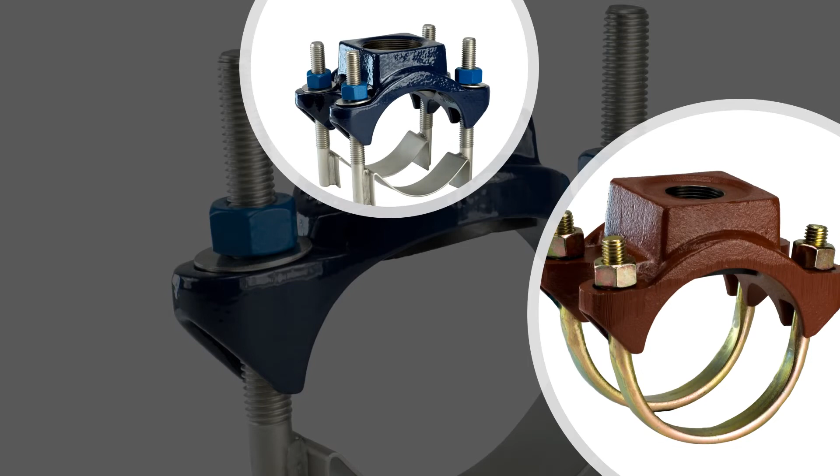Welcome to JCM Industries presentation, Installation of 400 Series Service Saddles. JCM offers a wide variety of service saddles for all types of pipe for selection by the engineer, pipeline owner, and contractor. Selecting the style and design of service saddle is determined by the type of pipe, line content, and environmental concerns. JCM service saddles offer a common assortment of coatings, strap material, and gasket compounds.

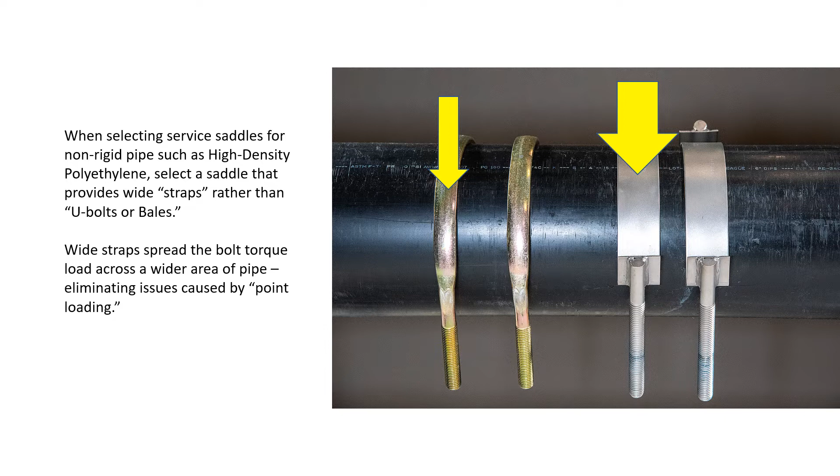JCM service saddle models offer two types of straps. For rigid pipes such as ductile iron, cast iron, and steel, the U-bolt bale style is suitable. For service saddles on flexible piping, including PVC and HDPE, and pipes subject to breakage such as asbestos cement, JCM recommends wide strap saddles. The wide straps spread the bolt torque load across a larger area of pipe, eliminating issues caused by point loading of the narrow U-bolt, and support the pipe wall on the circumference.

JCM service saddles are furnished with a broad gasket that provides a large footprint on the pipe and compensates for rough and pitted pipe surfaces. It is set in a retaining cavity that traps the gasket both internally and externally to prevent gasket displacement. Setting the gasket into the cavity also lowers the saddle body profile on the pipe, placing the solid casting closer to the pipe and limiting exposure of the gasket between the pipe wall and the saddle.

Saddle gaskets feature a hydromechanical lip that provides a positive initial seal on the pipe. Saddle gaskets are fully activated by water pressure applied to the top of the hydromechanical lip, and sealing pressure increases as the line pressure increases. The JCM gasket has a durometer that stores energy and will expand and contract with a pipe outside diameter that fluctuates, such as a high-density polyethylene pipe, maintaining a positive gasket seal on the pipe wall.

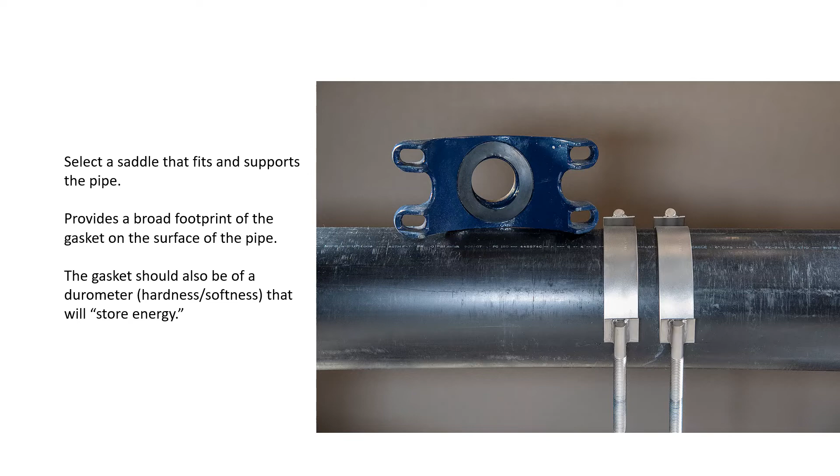For the best application, the specifier will want to select a saddle that fits and supports the pipe wall, that provides a broad footprint gasket on the pipe to provide maximum pipe-to-gasket sealing area, and has a gasket that stores energy. When planning the installation, a full review of the printed installation instructions is recommended, so any details can be addressed prior to arriving at the job site.

Some helpful tools to have on hand at the site include a pipe OD tape, inspection mirror, spray bottle of soapy water, liquid dish soap, and a field-grade torque wrench. Upon opening the box, check that all the parts are present, that the fitting is free of shipping damage and is the correct size for the pipe. For flexible pipe and fixed OD pipe, JCM offers saddle ranges that are pre-formed to that pipe OD that help prevent the installer from over-tightening the saddle on the pipe.

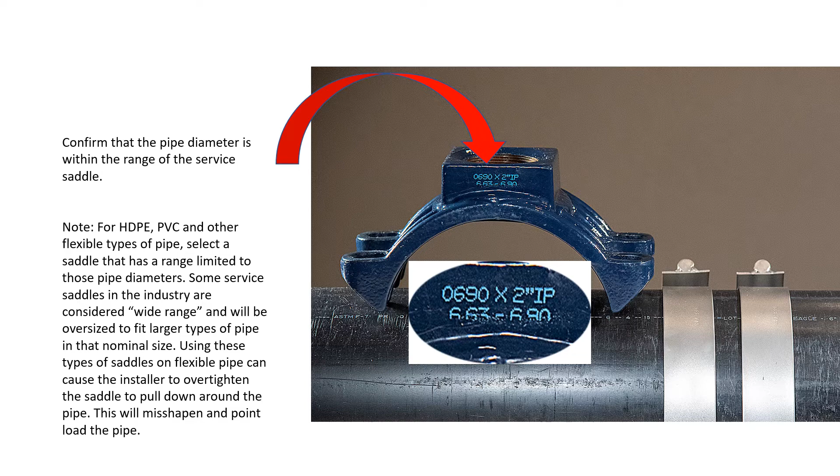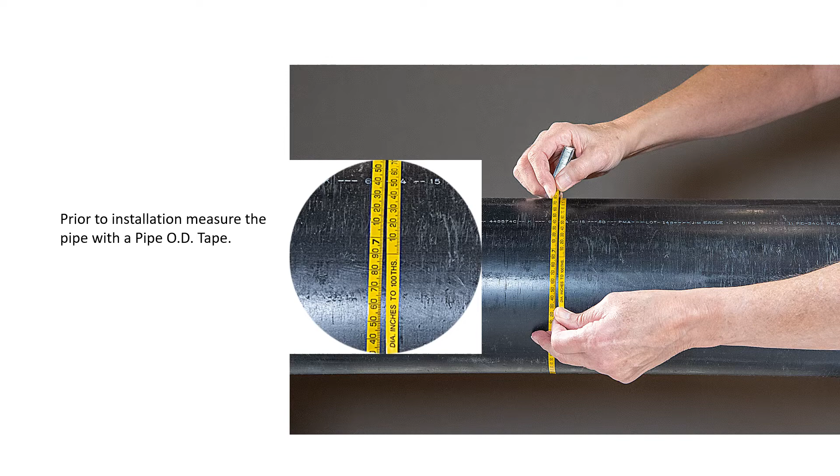Begin the installation by scraping and cleaning the pipe surface, especially where the gaskets make contact with the pipe. Remove any scale, pipe wrap, debris, or dirt that may interfere with the sealing of the gasket. This is a good point to inspect the pipe at the tap location for integrity, size, outside diameter, and any surface irregularities, including any damage that may have occurred due to excavation. Measure the pipe with a pipe outside diameter tape to confirm that the saddle is the proper size. A caliper can be used to determine if any pipe eccentricity exists.

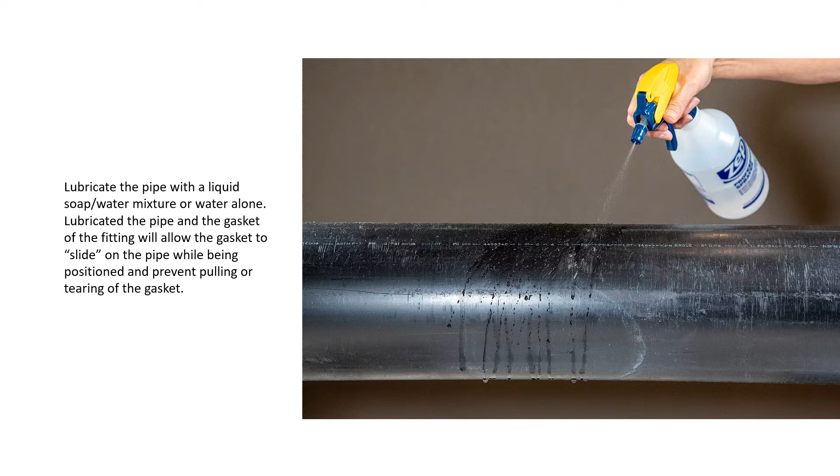Lubricate the pipe and the gaskets with liquid dish soap mixed with water. Soapy water is safe and dissipates in water. If soap is not available, use plain water. Lubricating the pipe and the gasket of the fitting will allow the gasket to slide on the pipe while being positioned and prevent pulling or tearing of the gasket. Do not use an oil-based pipe lubricant. It can leave a film on the pipe gasket surface and interfere with the watertight seal of the gasket.

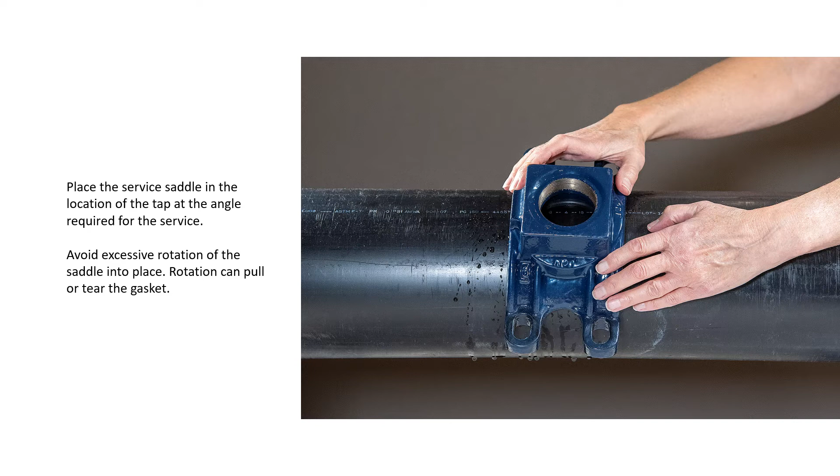Place the service saddle in the location of the tap at the angle required for the service. Avoid placement that requires excessive rotation of the saddle into place. While the pipe and gasket are lubricated, excessive rotation of fittings that have outlet gaskets can roll the edges or tear the gasket, causing a leak channel or gasket seal failure.

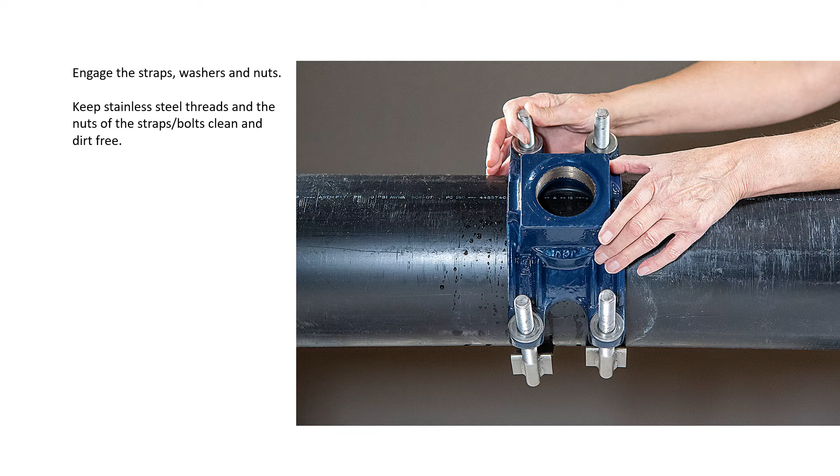Engage the straps, washers if furnished, and nuts. For fittings with stainless steel straps and fasteners, it is important to keep the threads and the nuts of the straps and bolts clean and dirt-free. Stainless steel fasteners will seize or lock up when debris comes between the thread and nuts, which will prevent the fitting from being completely tightened. In some cases, it could cause the installer to have to cut off the bolts and straps and acquire replacements.

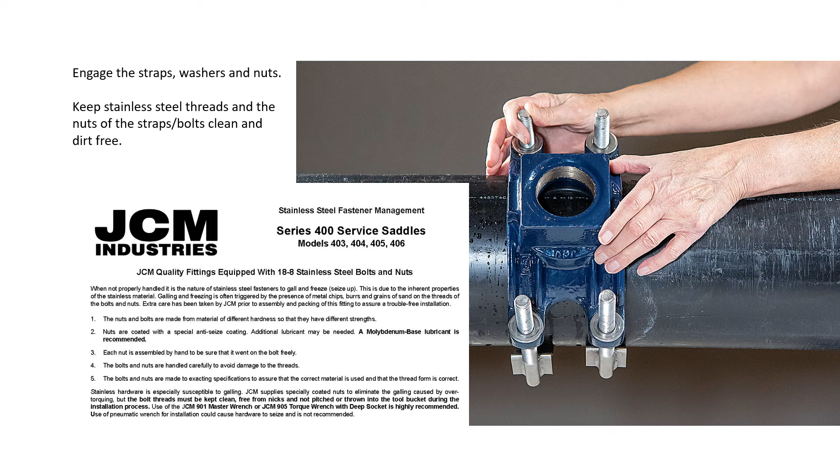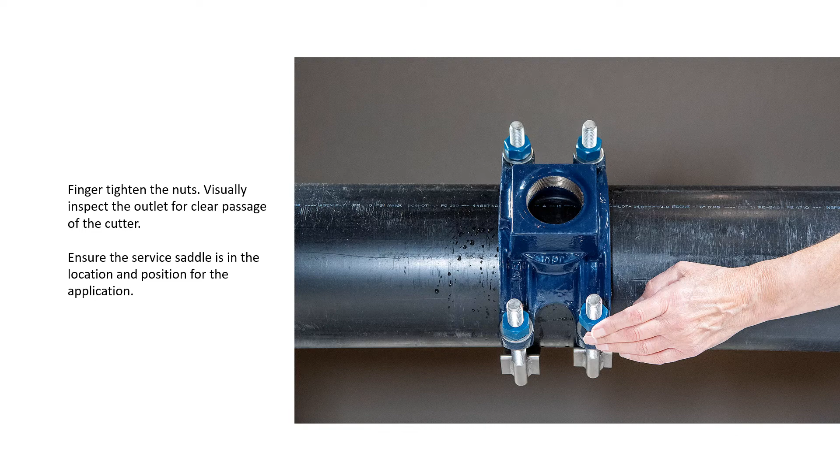Finger tighten the nuts. Visually inspect the outlet on the pipe and ensure the gasket remains in place and does not interfere with the passage of the cutter. Ensure the service saddle is in the location and position for the application. Tighten the nuts in an alternating fashion. Ensure equal amounts of pressure are applied to the straps on the circumference of the pipe and straps are drawn up equally. Refer to the manufacturer's instructions for acceptable bolt torque levels and ensure those levels are reached.

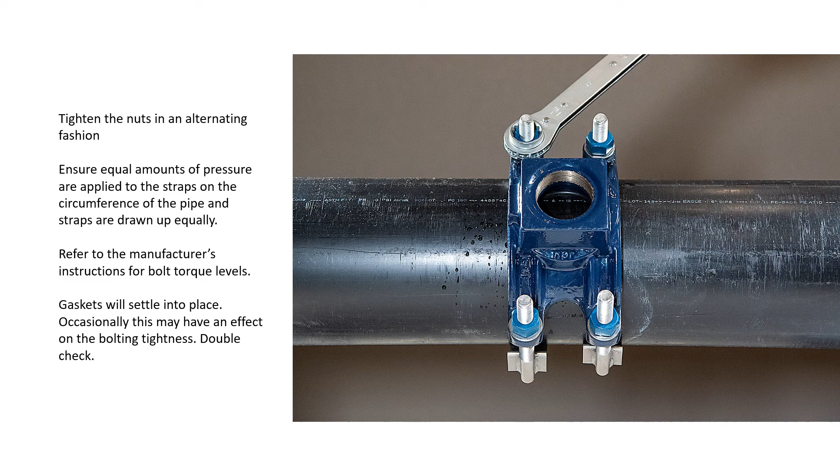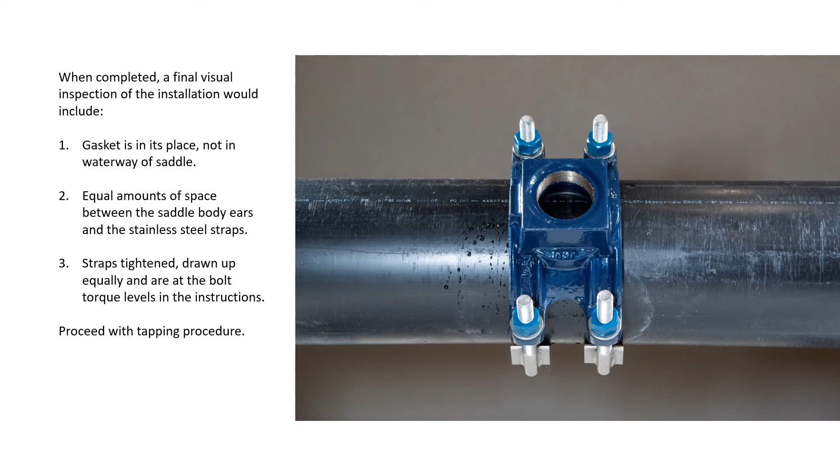Once tightened, wait about 15 minutes and double-check that the torque levels remain the same, and tighten if needed. Under pressure, gaskets take on a liquid-like character and will settle into place. This may have an effect on the bolting tightness. Always double-check. When completed, a final visual inspection of the installation includes: gasket is in its place, not in the waterway of the saddle. Equal amounts of space between the saddle body and the straps. Straps tightened, drawn up equally, and at the bolt torque levels in the instructions. After inspection, proceed with the tapping procedure and backfill carefully.